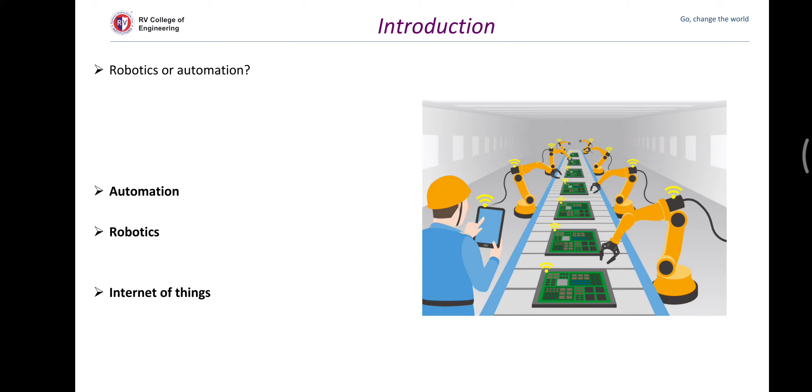Then coming to basics of robotics. First we'll look into the mechanical structure of a robot. A robot is basically fabricated with aluminum 6000 series, which is the most frequently used material for robotic structures.

Coming to the joints, there are prismatic joints, revolute joints, and spherical joints. Prismatic, in the sense, is a sliding joint. Revolute is a revolving joint, and spherical has 3 degrees of freedom. It can either rotate about the z-axis and also move in xy coordinates.

End effectors or manipulators are something which do operations on objects. At the end, like we have in a third axis, it has a prismatic joint. It can move up and down, like it can drill. So it is the end effector doing the drilling.

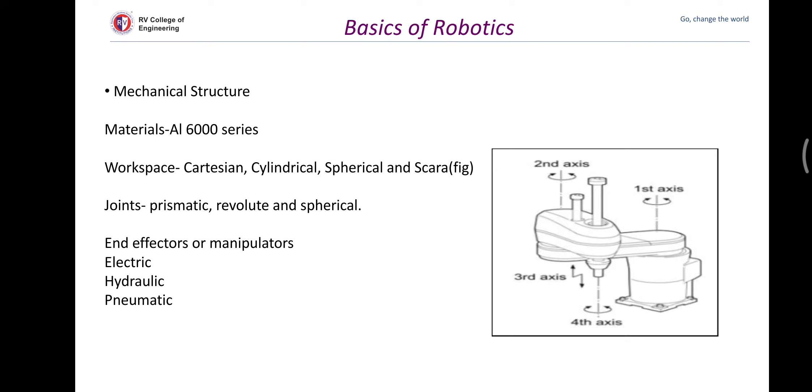Okay, coming to the forward kinematics of robotics. Here we give joint angles as the input and the final position and orientation as the output. As you can see in this diagram, we have L1 as the link length of the first link, and L2 as the link length of the second link.

So if we give certain degrees of angle for theta 1 and theta 2, the end effector takes the final position, that is x comma y. To calculate the final position x comma y, we have to calculate the x components and y components of both links.

So the x component of the first link is L1 cos theta 1. The x component of the second link is L2 cos of theta 1 plus theta 2. So the final x component is L1 cos theta 1 plus L2 cos of theta 1 plus theta 2. Similarly, the y component is L1 sin theta 1 plus L2 sin of theta 1 plus theta 2. Here in the forward kinematics, as I said, theta 1 and theta 2 are the inputs.

The output is x comma y.

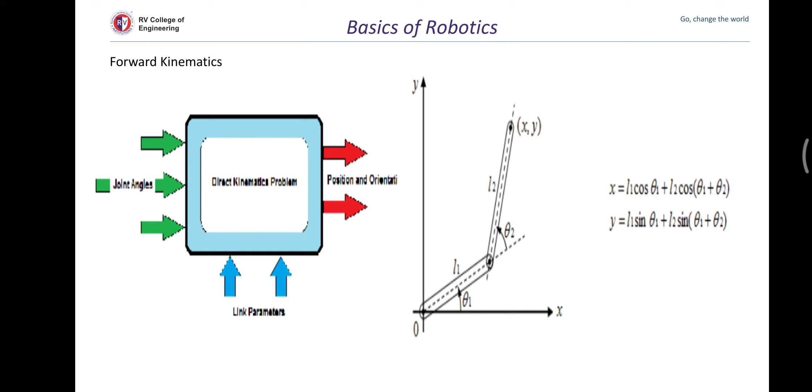Now let's look into the inverse kinematics. Inverse kinematics, as the name suggests, is the inverse of the forward kinematics. Here we give the final values, that is x comma y, the coordinates, as the input, and the robot decides its own orientation, that is theta 1 and theta 2. We know L1 and L2, the link lengths of link 1 and link 2, and we also know the final position where the object is to be placed. So if we know x, y, L1 and L2, we can calculate theta 1 and theta 2 by using simultaneous linear equations, and so we get theta 1 and theta 2.

But one thing here is, in forward kinematics, you give theta 1 and theta 2 so that you get a specific x comma y position. Here, if you give any x comma y, you will get multiple solutions for theta 1 and theta 2. So forward kinematics will have only one solution, while inverse kinematics will have many solutions.

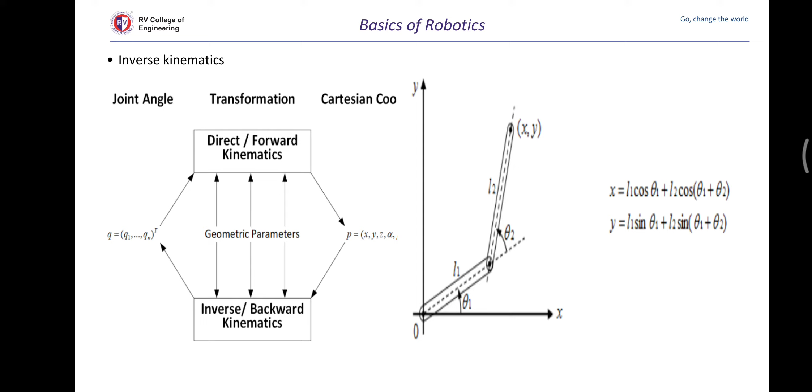Coming to the history of industrial robots: it started way back in 1956 when George Devol and Joe Engelberger established a company called Unimation, the first industrial robot arm based upon Devol's patent. Then the Japanese began a robotic association named JIRA, the Japanese Robots Association, which was formally incorporated in 1973.

Then the first fully electric and microprocessor-controlled industrial robot was set up in Sweden by a company known as ASEA. The robot was IRB6. It was delivered to a small mechanical engineering company in southern Sweden in 1974. It had a similar arm movement like a human arm; it mimicked that of a human arm.

Then again in Japan, Hiroshi Makino of the University of Yamanashi first developed the SCARA robot, which is the most popular robot. The SCARA robot is very frequently used for assembly, as it is most used in assembly type operations.

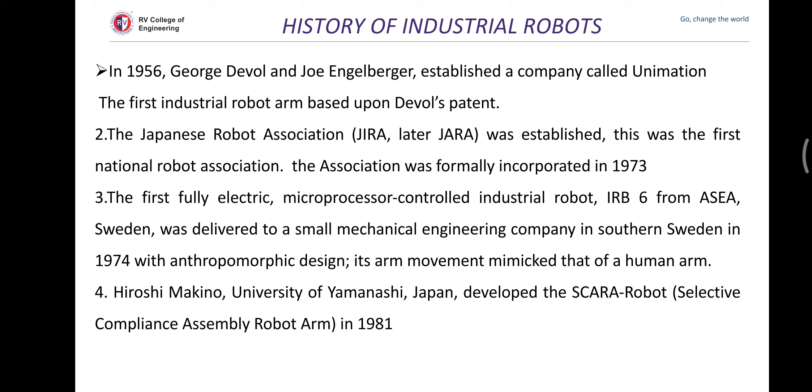Then coming to the history of industrial robots in India. India is one of the strongest growing economies among the Asian emerging markets.

Since 2009, so many robots had been installed in many industries in India. In 2017, India ranked 14th regarding the global annual supply of robots. You can see the number in thousand units in the graph on the right side. From 2007 to 2017, the graph has been gradually increasing.

The automotive industries will remain the main driver of increasing robotic installations because they are more incorporated towards repetitive tasks to produce automotives. Robots can help in production and also in installation and assembly.

In India, the automation levels are less in comparison to foreign jurisdictions. The main reason for this is the cost arbitrage in labor trade-off with robots is less due to the availability of cheap labor. In India, we have a population of more than 1.3 billion, so the manpower here is very cheap.

For a specific finance, we can get more number of laborers, but the robot will be very much precise and accurate in whatever it does. Humans get deviated when they are doing a repetitive task, so robots are more suitable for this kind of operation in the automotive industry.

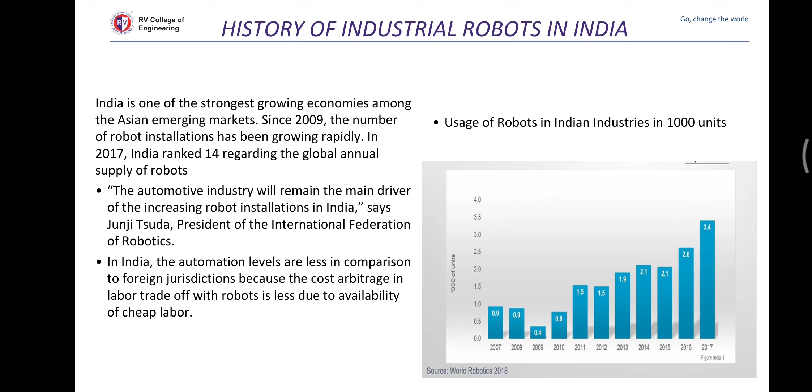India has several initiatives in development in the space of artificial intelligence, machine learning and robotics.

The Ministry of Commerce and Industry in India plans to stimulate the use of robots towards Indian trade and industry transformation, so it plays a vital role.

Further, the 2018 financial statement given by the government showed intention towards investing more in research activities related to artificial intelligence, robotics and automation, which should be incorporated in industries.

The Government of India has also been funding many projects by educational institutions in areas of computing and wireless sensor networks for real-time landslide monitoring, etc. These fundings include the procurement of sensors and building the conceptual proofs of robots.

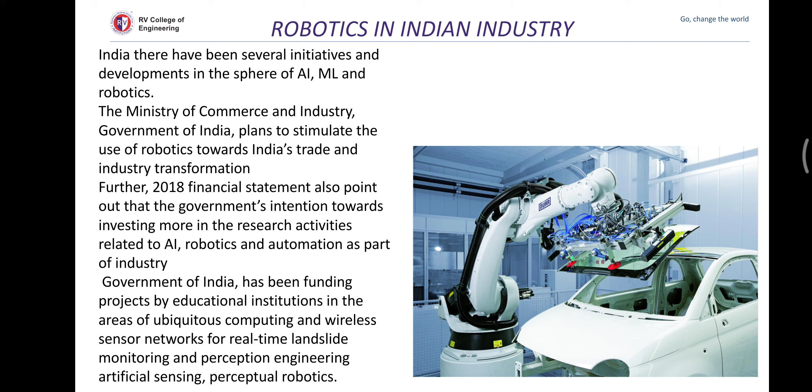Now, coming to the relevance of robotics in different industries, robots can be used in manufacturing and supply chain management, as I mentioned earlier.

Manufacturing industries are transforming themselves towards digitization and developing their supply chain activity through IoT. Robotics are very important in assembly lines and supply chains, as these are very repetitive tasks, and it can reduce manufacturing lead time. So robotics in manufacturing and supply chain are very crucial.

Public health and safety: the Indian healthcare sector is already under pressure due to high population. India is very densely populated, requiring a large number of medical cares, hospitals, physicians, and care professionals. As a result, a large segment of people is underprivileged even for getting primary healthcare services. If cheap labor is used to produce medical equipment and medical gear, it will take a lot of time, and no one can ensure 100% accuracy in these things. So robots in public health and safety play a vital role.

Underprivileged people can get primary healthcare services if robots and automation take over industries of public health and safety.

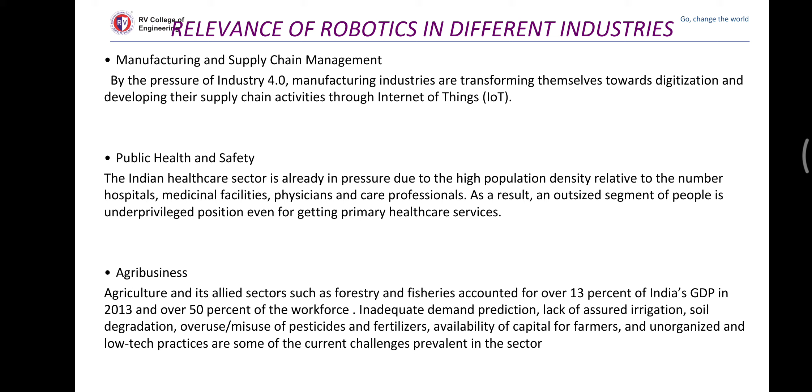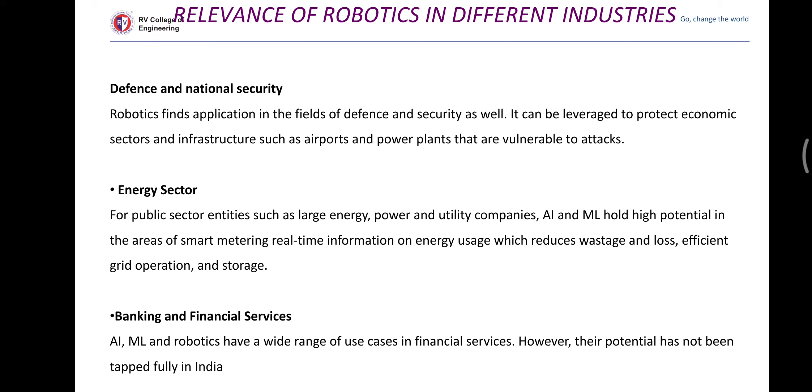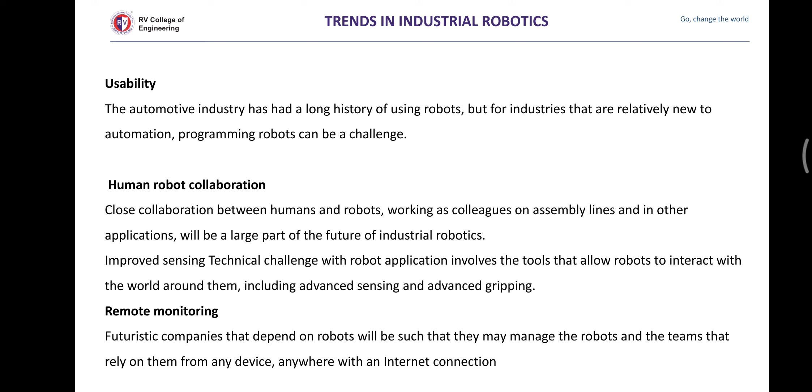So coming to the conclusion, today industrial robots and robotic systems are key components of automation. More than 1.1 million industrial robots are operating in factories all over the world. Some important conclusive points: improving quality of work for employees, automation helps improve work quality and safety, and it increases production output rates, giving more accurate results, improving product quality and consistency, and increasing flexibility in product manufacturing.

You can operate robotic and automation systems any time of the day. It's not like they get tired after 10 o'clock at night; they have availability 24 hours a day, which also reduces operation costs. In addition, robots work long hours and handle heavy objects without getting tired or making mistakes, which is one of the main advantages of robotics and machine learning, leading to improved quality.